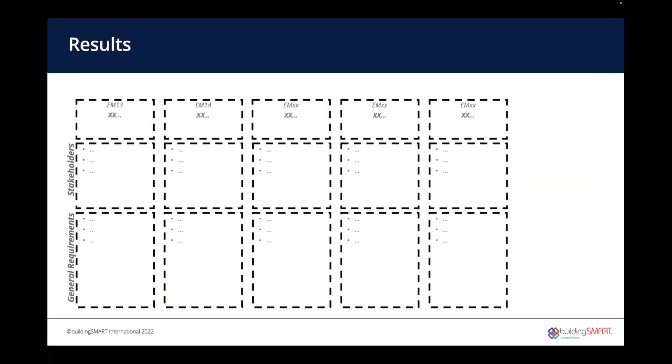To wrap up the summary of the results, the whole intent is to state this problem in a way that everyone can understand, that we have a common agreement on the facts, and can understand the complexity, so that we can come together as a community and really talk with each other.

In the formulation of this report and a lot of the research I did, I always felt like the stakeholders were talking at each other or past each other. I think there's an opportunity to really sit down and say, okay, I think we understand everybody else's points of view. Now let's say, obviously there's no simple solutions, so let's start working together on what are those possible solutions.

Another key thing is that we recognize an IFC-based workflow or exchange may not always be the solution. But if there are other open standards, other technologies that are open and people are willing to leverage, we should recommend and leverage those.

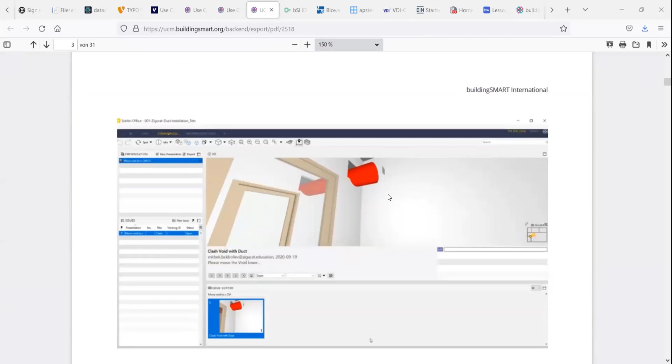So what kind of issues in industry we have? How or where we could see this kind of implementations? Just a classical, there are clashes, right? It can be soft clashes, hard clashes, or time clashes. This is a very major aspect, especially on the construction side. So these are examples that we thought might be interesting, not only for clashes but also for different applications.

And what about asset management? We thought, okay, as soon as you have your as-built model, you will start to bring your dynamic information to it. How? You will not use an IFC. Well, it could be possible to use IFC as a static model, but you have something different.

As an inspiration, we saw that video - you know this video, it's a well-known video introduction on OpenBIM, like what does OpenBIM mean for you. There, as exceptional as this case, you will see that this explains implementation of IFC and implementation of BCF and issue management on the left side. So you communicate dynamic information with the help of BCF and the static information like a building model. Doesn't matter in which stage, it should be, of course, implemented via IFC.

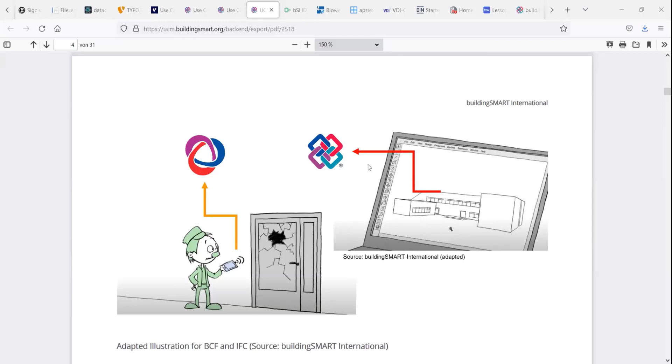Those issues in the building - monitoring, issue analysis, issue management, action applications, or issue evaluation - are stages, and these stages are also covered in Six Sigma. So efficiency is the most important aspect for us. How you would go through these aspects.

So BCF for owners. Besides the model communication for facility management, you also have the important aspect that building owners will be engaged in it, and this is, I guess, a key or crucial point. The building owners always have to be informed what's going on at the construction site. If you don't communicate with them, later on it will cost a lot of money, because the client will say or give feedback that something is wrong and you have to change maybe a material on site.

In this case, we would like to cover some methods. So if you have an existing building, there will be some cases on how to digitize. If you got lucky - in case one, you don't have any drawings. You got, yeah, classical, like Jeff already mentioned, and it's already known that most of the buildings are existing buildings and, moreover, not energy efficient.

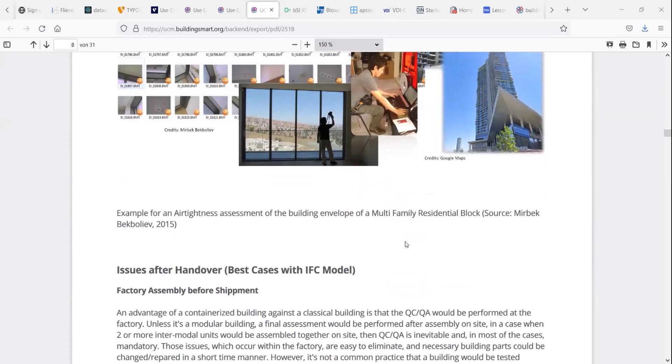So this is coming to a point. The requirements we are facing could be a passive house building or LEED certified, a candidate for LEED certification. For BREEAM there are requirements to have an airtight building. Also American USACE, United States Army Corps of Engineers, requires airtight buildings. So you have to perform this blower door test, document them. This is a client requirement, and you have to meet them and prove that this building is airtight enough.

So then we go through the requirements you will definitely address. And in this case, the idea comes that we will use BCF to document it.

Just as a real example, I will show a small scale proof of concept. The scale is usually done in a really small scale, and this is a containerized building that we built in the factory. It left the factory being tested for blower door test and thermal imaging, and it even performed the energy simulation on it.

And later on, the model is based on two different models. There's IFC4 based on IFC4 coordination view, and IFC2X3 - IFC4 reference view and IFC2X3 coordination view. We use these MVDs to export for specific use cases, because not every use case will be covered in one model.

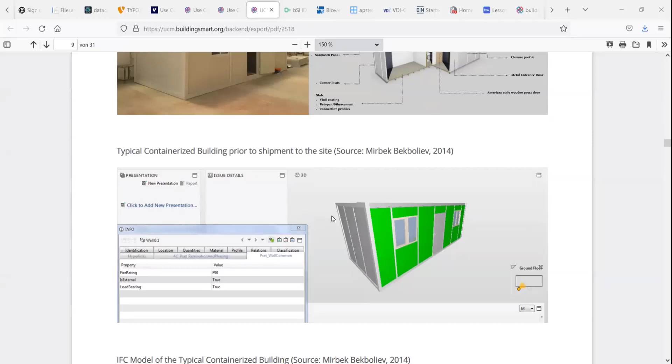It's cliché that one model will cover everything, even super detailed - no. In some cases, like for daylighting analysis, I will mention it later. So this building was done, and we performed some model checking and realized there are some cases where you have to improve that, as well as for DFMA, for prefabrication.

There are some shortages where you cannot cover everything, yet with the basic stuff you can cover most of it, already mentioning some important building components. The building, imagine, had a time period of 10 years, and this kind of containerized building is used everywhere - maybe as residential for temporary disaster relief, accommodation, or very commonly on construction sites for foremen sitting in the building and freezing in winter because of drafts and problems in the building envelope.

So this is the case we mentioned. We did the same blower door test, same thermal imaging to document, and we found several leakages, thermal bridges, and other issues that could potentially already be eliminated at construction site. There are a lot of hand workers involved, so this is the case.

This shows how we could check what we can perform, like capturing water usage, running classical energy monitoring for the entire year to have building conditions for the whole assets - the whole components, walls, windows, doors. So the building envelope should be assessed.

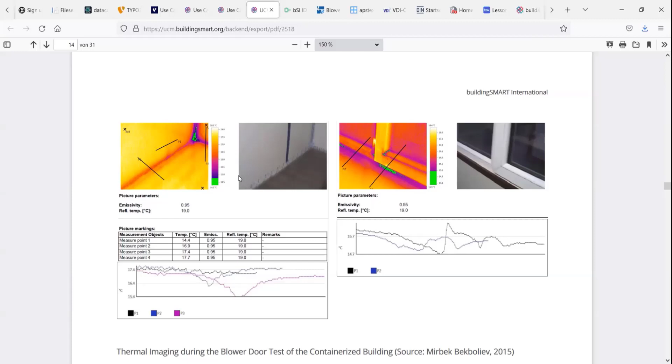As you can see, we performed some improvements in the building, and we can communicate with them through BCF. We put one issue management tool on the platform - there might be commercial examples like BIM Collab, Solibri, and I can give you some examples in a second. But I wanted to just show one video so you can see what we're talking about.

So this is the building. As you can see, we can transport information, bring the location of the issue, map them, and exchange it as a report. The building assessor, in this case a sustainability consultant or energy consultant, will be able to see the real location of the measurement, the location of the issue found during the assessment.

Most importantly, at the end this issue management and the BCF will be sent to the architect or maybe other parties, but most importantly to the client. The client will be informed, and it's commonly known there are a lot of different open possibilities to show that your building is being documented.

This is a dynamic process because you'll have your issues documented - when this issue popped up, who did the improvement, and as you can see there's also a blower door test certificate attached to some improvements. The post-improvement thermal image shows that all the leakages, all the thermal bridges, were eliminated. This is the most important aspect.

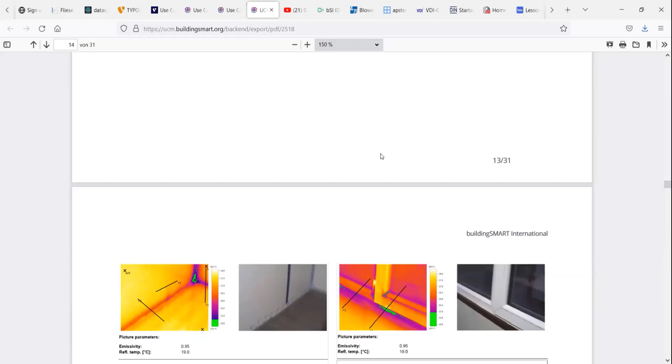So I'll go back to the main page. We performed the work, documented it, communicated with other parties, and this is not within the IFC model - it's in our issue management platform, which documents with the help of BCF, and all the information including certificates and requirements can also be transported with BCF.

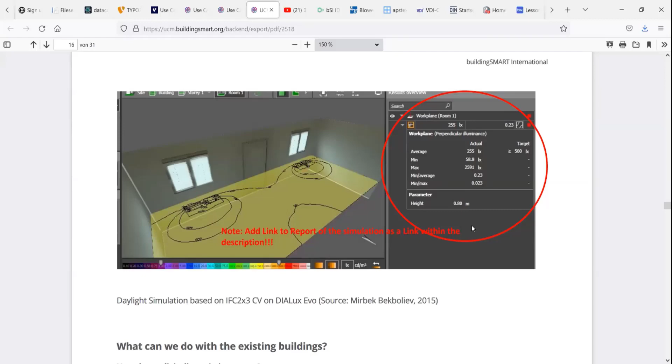Just an additional example - within the building you can also communicate the same way the reports, or just intermediate reports, of your simulation. This is important here - building energy modeling. The simulation output telling the architect or the prefabrication company, could you please check that the building model will be improved, because our current daylight simulation is not passing our requirements. So maybe the location of windows needs to be improved, or a skylight installed with solar protection.

So I will pass it now to Gianluca. Gianluca will show you a similar example from a different perspective. Gianluca, the stage is yours.

Mirbek, the battery is gonna die. Just saying. Oh, okay, get your power cord. No, it's not the battery, it's fine.

Hello everyone, my name is Gianluca. I will now add one particular use case on what Mirbek was presenting, and Jeffrey as well so far. It's a use case we already presented in the previous virtual summit, and we actually integrated this use case into this particular project that was just presented. I'll try to show it quickly for those who already saw it, or for those seeing it for the first time.

So this is about a primary school in Switzerland, located in Rapperswil. There's a building owner willing to renovate the buildings, with the idea of optimizing them in terms of energy, improving the envelope conditions, and identifying the problematic parts of the building. He wanted a really efficient way of documenting these things, making a fast cost estimation of the renovation, and prioritizing the parts that could be renovated.

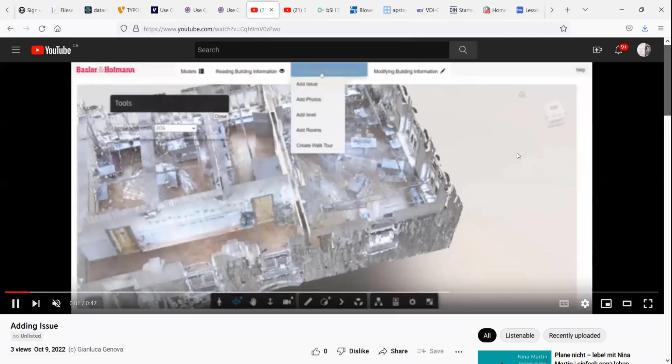But I will just go through some pictures and see if there's any YouTube link which could be particularly relevant. So Mirbek, let's hope I don't lose this page again. All right, so here you can see that's how we added it.

We could add a model - let's call it an information model - which is based on this mesh model. Any kind of issue, we placed in a certain room, at a certain level, in a certain position of this model. So what it was doing, of course, we will not have the windows as an element, or the doors as an element.

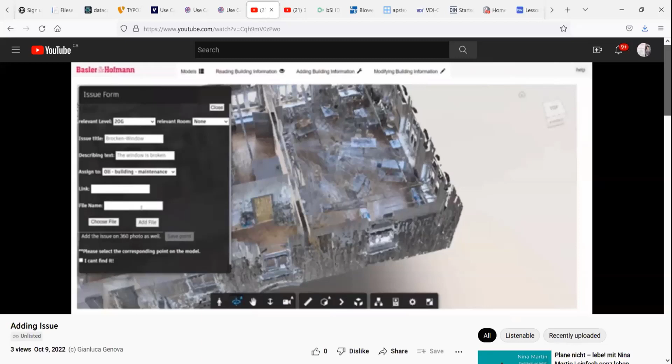Of course, this geometrical model can be compared to a sculpture of the building. But what it was able to do is locate any kind of point associated with an issue, or any kind of picture associated with an issue as well. And this was the way we added the issues to the model.

We could just click a screenshot - okay, now maybe you have to help me for that. Right, so as you could see, while we used 360 images and the mesh model in combination, the reason was it's really easy to identify material or texture, any defect from a picture if you particularly saw it, and document it. But the picture doesn't have any spatial context.

It can't relate to any room or space or level or whatever we know from the BIM world. As you know, traditionally what we would do is create a folder for every single room, put all the pictures inside, and hope the pictures are really documented in a nice order. But in this workflow, you don't need to follow a certain path.

You can just, as an expert, go wherever you think is relevant, or start to analyze the envelope, and then you can just open issues. The reason we used 360 images in combination with the mesh model was that mesh models are really good when it comes to dimensions - having an understanding of the volume of the space, of orientation. These cheap LiDAR tools, which you can now even use with an iPhone or any smartphone with a LiDAR sensor, are able to do a scan. There's also the Leica BLK2GO, which allows really mobile scanning.

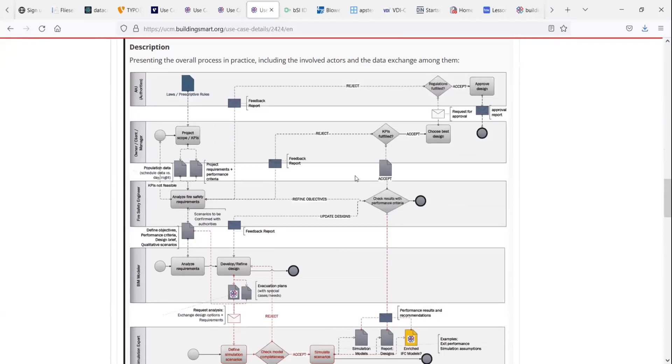When you click onto the use case, as you can see, you can download the PDF out of it. The PDF will serve as documentation with necessary information like process maps and potential exchange requirements that you will not be able to see otherwise. We recommend that you do your single sign-on registration.

I'll go back to the backend side, and you can go directly to our use case. There are different types that you map to these use cases with specific stages, resources, and sources. You can pack your original publications or simply refer to them. This is where you have all this metadata—very important, who is involved. If you go to the use case, you can see the related buildingSMART standards, most importantly tagged. In some cases you don't even have to make inputs, because it's directly linked to an existing repository.

You can integrate a process map—we skipped this time since we already presented it several times—this is the whole process map. Why did I pack it here? Because we have the most important information you need for a blower door test or simply retrofitting information. That should be at the very beginning of the requirements, then you'll achieve efficiency. Otherwise, in some cases when the client says 'oh, I need LEED gold' or whatever, when construction is already almost finished, you'll have a problem as a sustainable consultant.

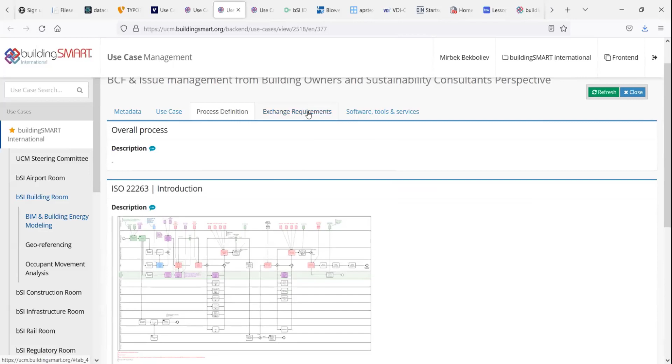One of the important parts about this use case management platform and setup is documenting those processes, as part of the original IDM workflows or process, creating these business process models is very important.

One of the things I believe they're working on next for the UCM service is trying to integrate a BPMN tool directly into the service so that everyone can use the same tools.

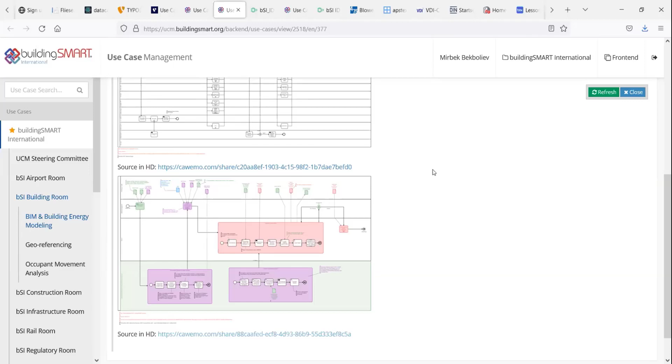In this case, Mirbek has used Camunda. It's easy - we directly link it, and you don't have to even make a necessary export.

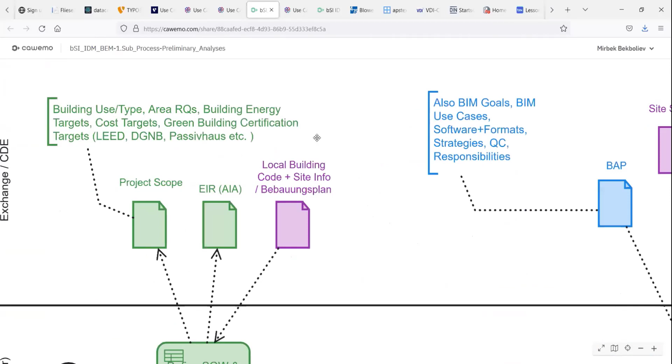You can make an export as a BPMN, like I see for processes, but you can also create a link and simply link it, because not everyone can see the details and would have to install it, so it should be there.

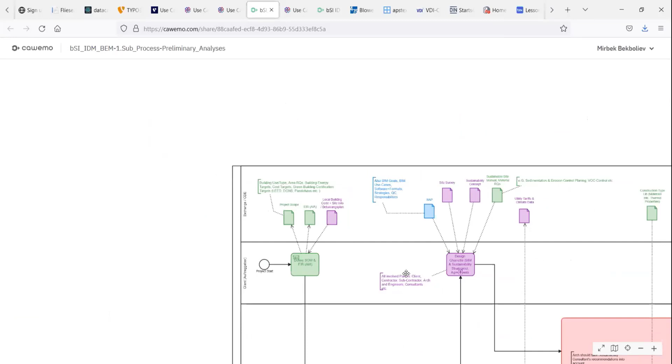So the great thing about this is then we start having a common ground in which we document processes and talk about the details of them, and hopefully share these in a way that people can see where particular use cases might interact, overlap, or share exchange requirements.

Yeah, as you can see, good that you mentioned the exchange requirement. There are different tabs - you define your use case, you define your processes, you define your exchange requirements.

By the way, these are two components - process maps and exchange requirements are the main parts of IDM. So if you, as a use case, start defining those two main components, you'll already be 50% of the way for your IDM. And IDM is a very important standard, ISO standard as well, to cover this specific topic.

As you can see, I will not go through the requirements, because this is a bunch of requirements that you need to perform the energy assessment - the general requirements on how to perform it.

Based on the report we had exchange models. Those exchange models were interlinked with process maps, so you know what you need at what stage and who needs to deliver which information. This is again IDM.

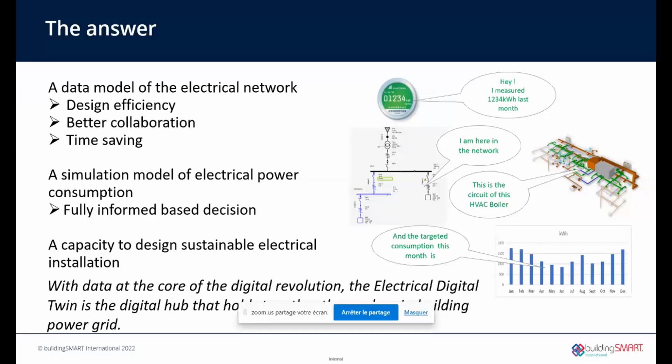So that is all the capacity that we must have in order to have a really efficient power simulation and power management. And for this, we see three pillars, three things. First, what we call the normalized electrical model.

We can see it as an IFC electrical, which is the capacity to have and exchange a model around the electrical power network. So the image of IFC is pretty simple.

Then second, the capacity to simulate the electrical energy or the electrical power consumption, the one I mentioned. And the one I didn't mention so far, still on the electrical network, is to offer the capacity to calculate and simulate the sustainability and life cycle impact of the network.

Because here, from what we know by different studies, in terms of sustainability, most of the impact - mainly if I look at CO2 - is related to the power losses that we have in the network: power losses in the transformer, power losses in the cables, power losses in every electrical device that is heating. And that is very important.

And to come back to the initial objective, maybe there are some ways to think differently and to size differently the network. So that's basically the three pillars.

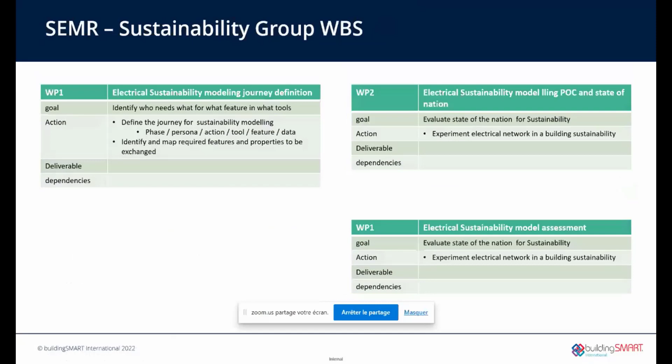And I think there are a lot of things to share with your room, especially around the electrical model on one hand, and we are totally aligned. If we look at our intention, or roadmap if I can say, it is to complete what you did in your document with a workflow, but looking a little bit deeper into the electrical network workflow. So it comes as a complement.

We mentioned IDS - it's also to deliver the different IDS for the main electrical objects during this workflow, et cetera. So I see a lot of complements with what we see. Unfortunately, I see time is getting short.

Yeah. No, thank you, Bertrand. No, thank you. And I think this is good. I'm glad that you also see the opportunity.

I think in the existing - like I said, we have a bunch of proposed exchange models, but obviously when I started the project and I started the report, it was before the SEM room was put together. So that's why we've been working now to address this with more of the rooms, especially your room, because there is that common purpose, right?

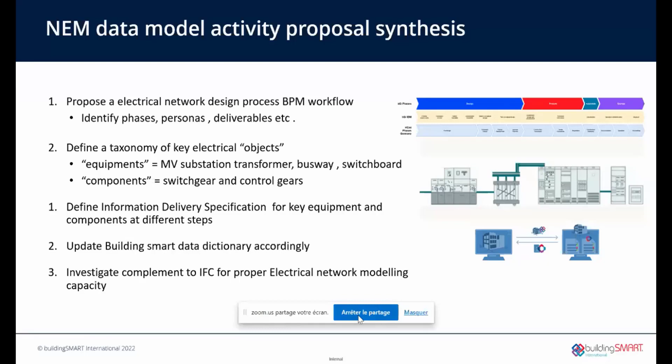And yeah, the different domains and the different expertise, I think, play well into each other and how we can have an impact on both the building energy modeling, sort of how it's conceived of today, and then how that actually benefits from your group's vision of having an impact on those EU goals by saying, well, let's look at the electrical network.

Yeah, I think it's a great opportunity. So we are going to wrap this up. And before we wrap it up, I'm going to say we still have lots of work to do over the next few months. And what my goal is before the next summit in Rome next spring, is that we have a working group together.

That we're able to have a plan in place, that we can look at the SEM Room's life cycle roadmap, and we can begin to coalesce and have those touch points and bring them together, and then move forward in determining a plan to start nailing down and fixing some of these issues.

Like I said, I'm not trying to solve all of the BEM issues. I'm not solving all the BIM issues. What I'm trying to do is create those opportunities where we can solve the data exchange issues in ways that are meaningful, not just to the immediate purpose, but to reach those goals of being a more sustainable society.